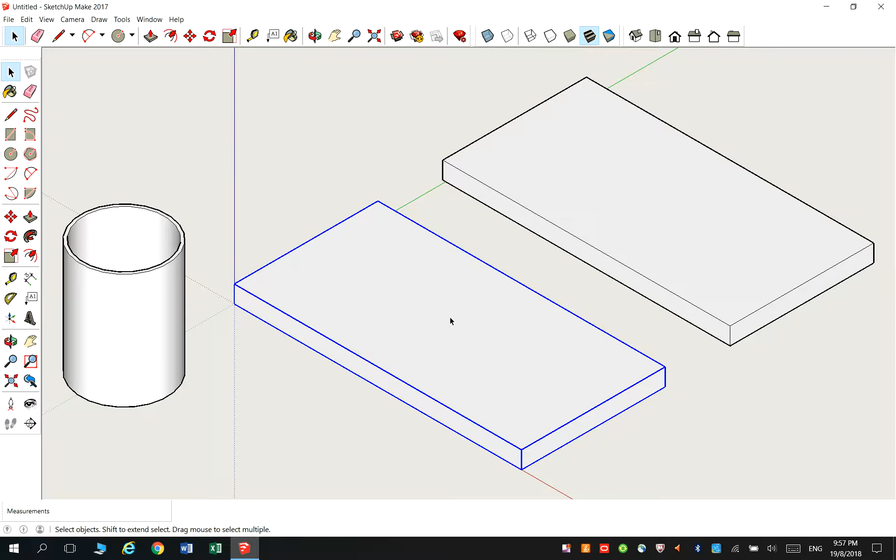Okay, now some of the students, what you did is that you actually could drill a hole, either a partial hole or a true hole. So for this purpose, let's make the hole here, okay, on the base here. So right click, edit component. Okay, so let's do the measurement.

So from here to here, for some of us, we measure it's about 40, and lengthwise we measure 50. Okay, and we created a hole, so the hole is centered here. Now this is the reason why we need to know where the center of the hole is. For this purpose we must remember the radius is 30 because the diameter of the tube was 60. So 60 divided by 2 is 30. So 30, enter, and I got the hole down there.

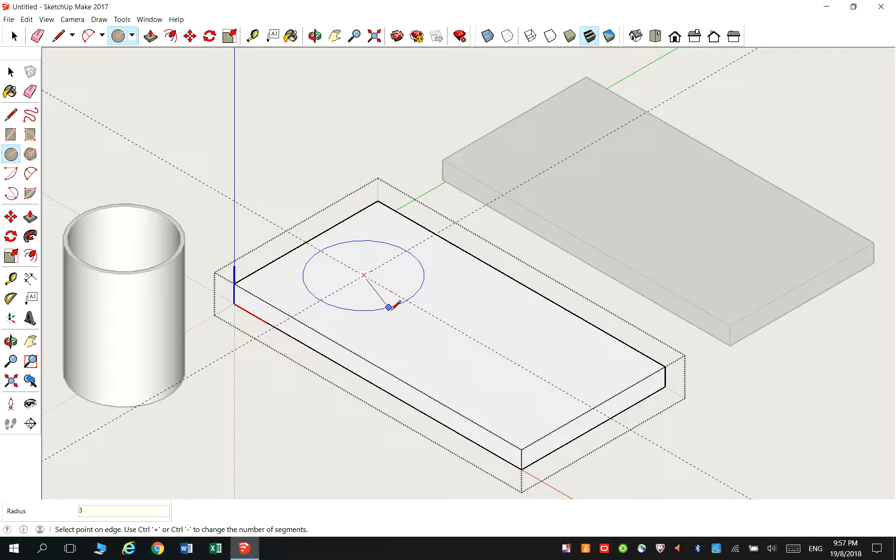Now for some of us, it's a true hole. Now the thickness of this material is 12. So you bring down 12. It becomes a true hole. However, if yours is a partial hole, what you can do is bring it half. So half of 12 is 6. So bring down 6, enter. And it's nicely done for you already.

Okay, now for some of you, you have actually created shapes. This is where it will be good for you to look at the shapes and the product, how you draw out. Some of it is organic, some of it is rather simple, we just cut here and there. So for this illustration, the main idea is just to make it a simple base. So one way I will normally do is that I look at it from the top view. I will round off the edges, just to make sure that I do it nicely.

What I normally did was to give measurements. Okay, I use the measuring tape a fair bit, so maybe a 10 here and a 10 here, then 10 from the top and 10 from the bottom. Okay, and then I make use of this arc to point out. So I click, and I have a nice arc down there.

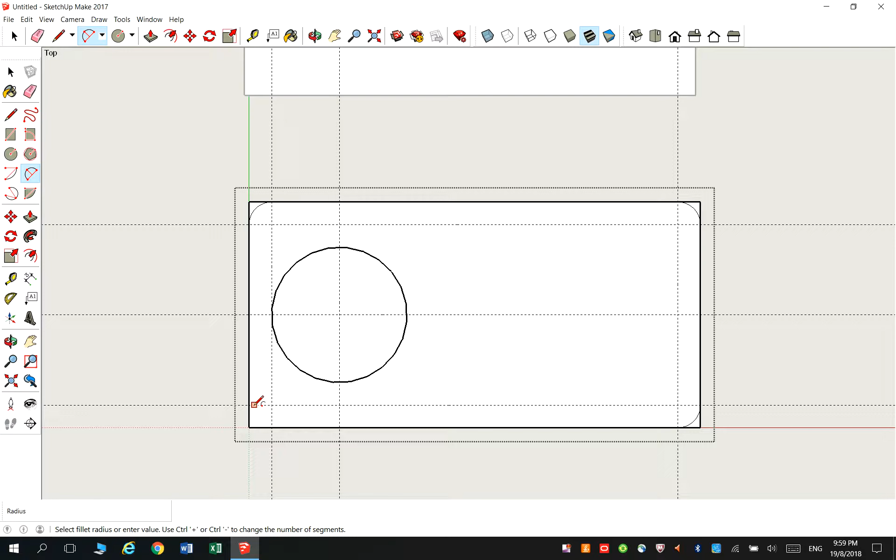Now this is where I will use the push and pull function to bring down the area. Okay, some of us, we know the height, so you can actually bring down a bit and press enter 12. This one here, bring down 12, enter. We can use the x-ray vision here. Okay, so let me redo again.

I use the x-ray function and I want to push and pull down, so I can bring it down. You can see, right? But we make sure it's done properly. Yeah, and then you can turn off the x-ray function. So it's nicely curved here.

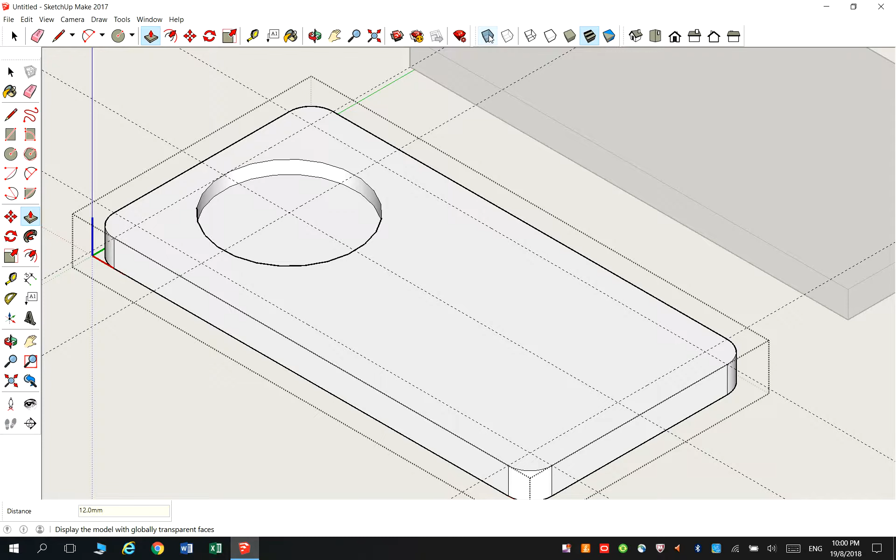Now for some of us, we have different shapes. So this is where you can continue by either using lines or using curves. If you can't replicate exactly what you have done on your actual piece, not to worry. Just do the closest thing that you can. We're not marking in terms of accuracy, we're marking in terms of your skills, your imagination, your creativity.

Okay? Okay, give it a shot. Once you're done, make sure you click on the outside and it's already done there. Now if the lines are very disturbing, what you can do is go to Edit and Delete Guides, and the lines all disappear. So you have done your base.

Okay, some students like to proceed with making changes. So what you can do, you can look at the paint box, look for material. Now it's a type of wood, so you can actually select the piece of wood. So maybe I will choose the base as dark red, right? So it's dark red Meranti, so I will use this one, so it'll be of this color, this shape.

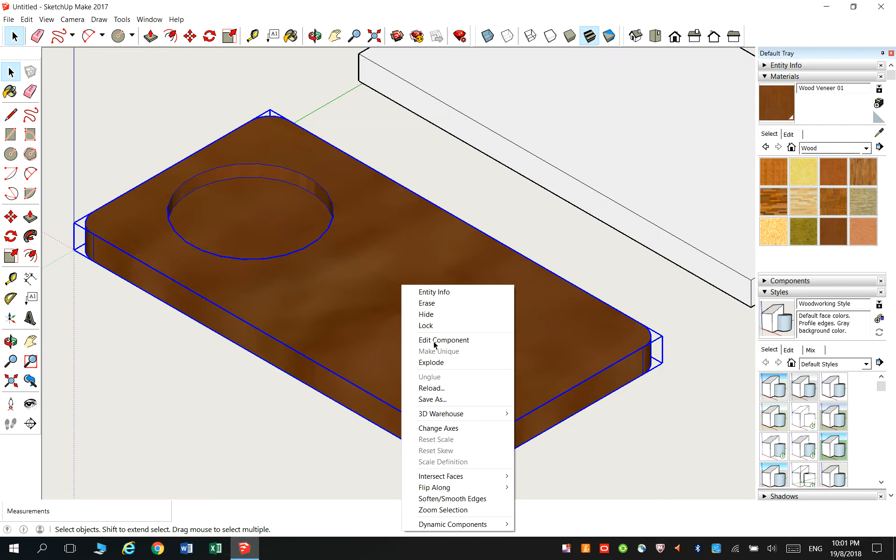If I want to edit further, remember, click on it, right click, Edit Component, make the changes on it, and then I will work it out. So once again, maybe I want to make it into a shape of a cut it out even more, so I will use my measuring tape, maybe 50, make another hole perhaps.

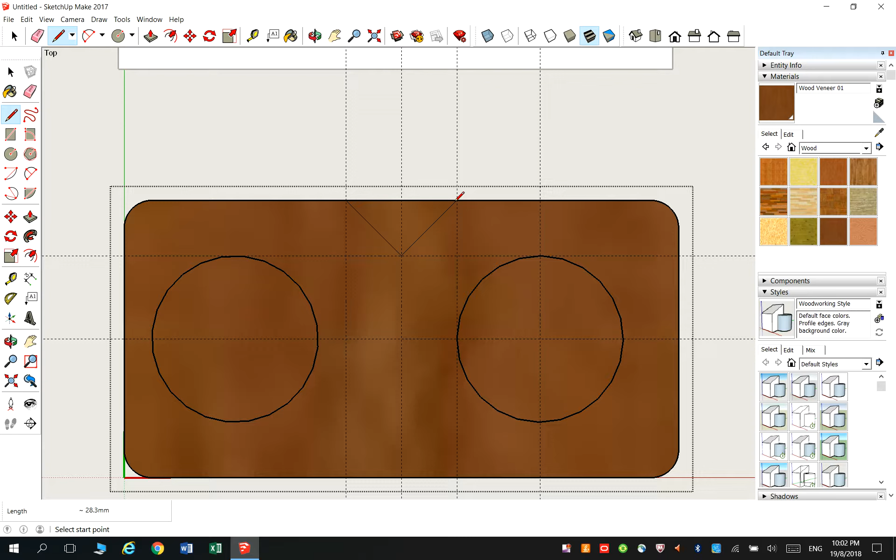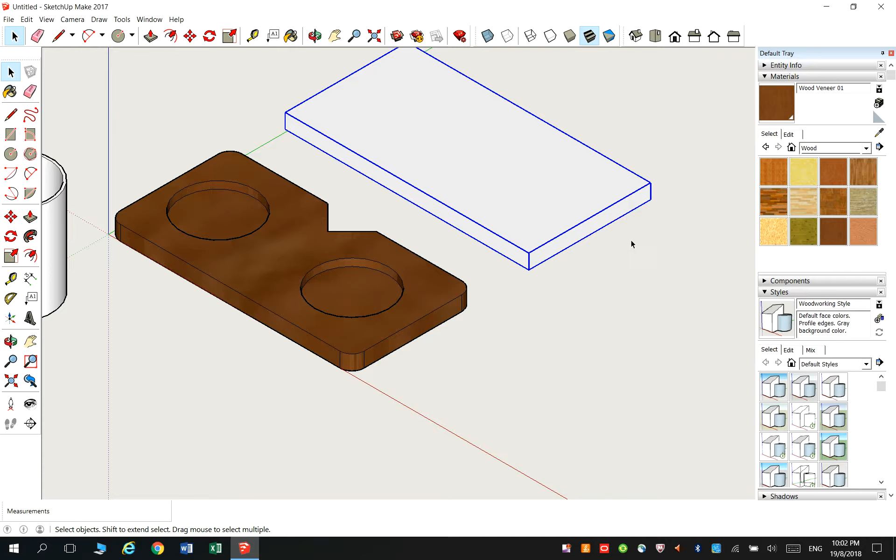So I work out my base, I play around with the lines and all, and I delete guides so that I have a clean look to it. Okay, now if you're done with this, proceed with the top, how you cut it out. Don't worry about making it vertical or shifting it or rotating it. Let's work it out as it is, and come up with the shape.

So remember, click on it, right click, Edit Component, cut out the shapes that it's supposed to look like. So for example, okay, plan view, this one you're looking at, use the pen, use the hand. Okay, come up with the shapes that you like or you have done. So some of you actually did a circle, quite a big circle. So with a circle it's always good to find the center.

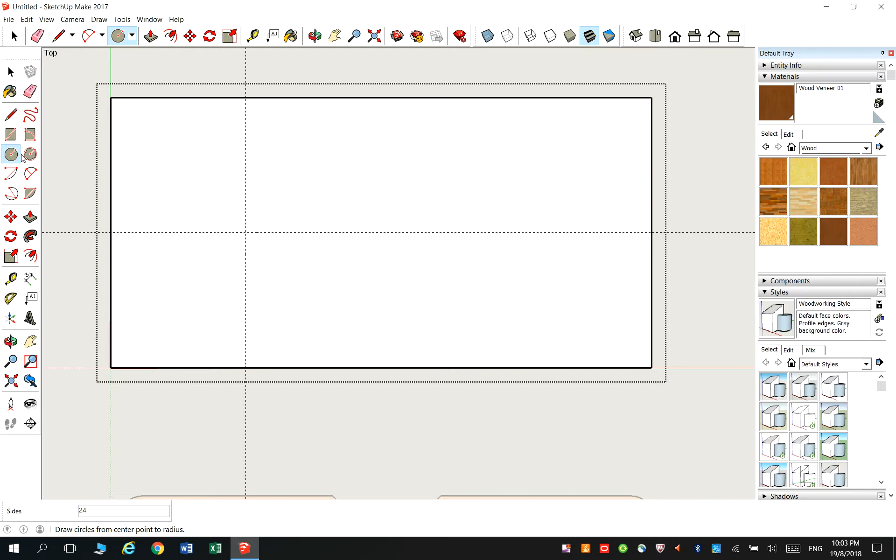So let's find the center here, 50. Find the center here, 50. I come up with a curve. Okay, so maybe one point, this point, and I click here. Then perhaps I will make something like a cone like that. Okay, some of the students have very interesting shapes, and I want to remove, so let's remove the others that I don't want. So 12, Push and Pull function.

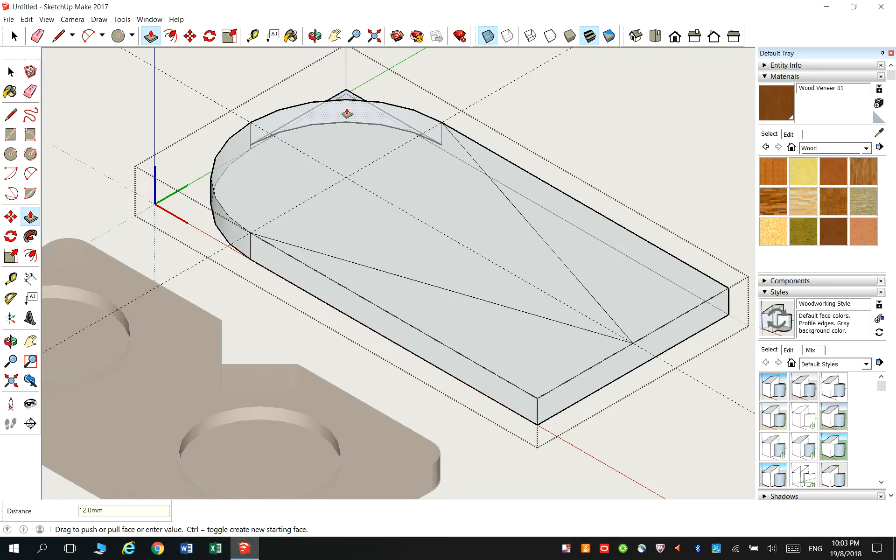Okay, if I can't see that well, I use the X-ray function. Bring down 12, enter. Okay, if things don't go the way that you want, you just want to undo, click on Ctrl Z. Okay, it's another way of doing the undo function. And I'm done. Okay, click off. Then if you want to add colors to it, again, Edit Component. So I use a lighter piece of wood, so I'll use this one.

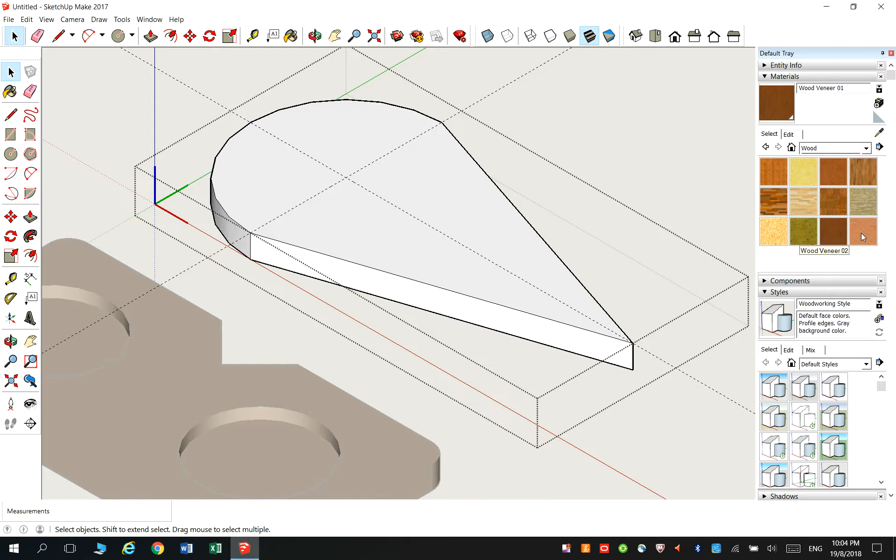Now if you click on this, it's actually faster to use this way. Okay, so that if I rotate it around, everything is of the same shape. So let's remove the guidelines, Delete Guides, isometric view, and I have all the material. Okay, let's change the color of this tube now.

Now the tube is clear, so what you can do, you can go to Glass and Mirrors. There are a few types, so you can click on this. It can be that color if you want a different color, blue. Unfortunately, we do not have it in clear crystal white. Okay, we have this one here, but it doesn't come out nice. So usually we will pick either the blue or the yellow, and you're done. So you currently have these three materials first.

Okay, now your task is to edit it accordingly, add colors, do the shapes that you are doing for your project, and work it out. Okay, give it a shot.